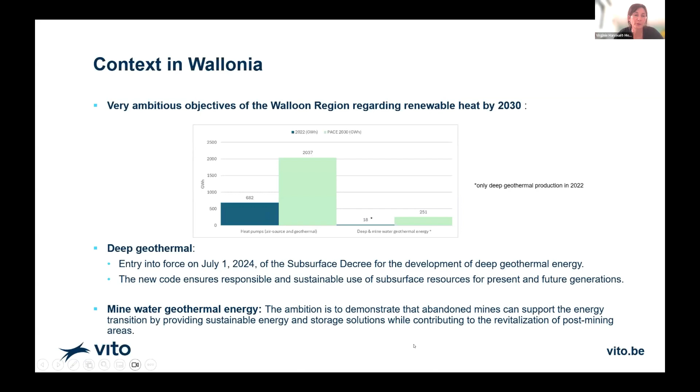The approach that was taken by the region is a quite logical approach. It's a step-by-step approach. So it started in 2018 with the assessment of the mine water geothermal potential at the regional scale. This was followed by a second step, which was looking in much more detail at what the potential can be, looking at feasibility studies in 3 different coal basins, but I will detail that in the presentation. And the final step in this step-by-step approach is the launch of the first Walloon mine water pilot project that should start somewhere this year.

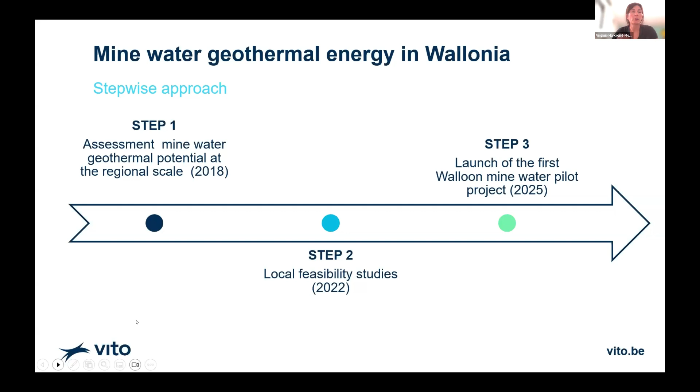So first of all, as said, together with UMONS, we tried to assess the regional potential for mine water to produce and to store heat and cold. Because a study at the regional scale can be very time consuming and we had a lot of data, UMONS proposed to use a proxy to measure the potential at the regional scale. And this proxy was the number of mined coal layers at a given location multiplied by the depth range at which these coal seams were mined.

And we did that on a grid every 100 meters. So it was a huge work that was performed, but what is nice is that it really highlights the locations where you should have the highest potential for mine water.

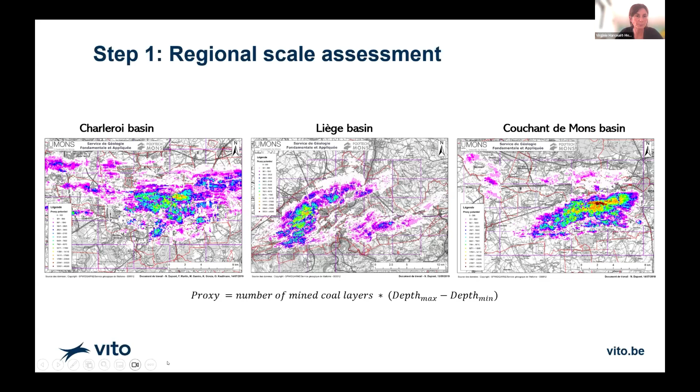And based on the conclusion of this first study, and also based on very conservative assumptions, the total technical potential in the region was estimated at almost 1,700 gigawatt hour. So this is significant potential, and it was sufficient for the region to justify the development of this energy resource in Wallonia.

And as such, SPW Energy decided to launch 3 feasibility studies in the coal basins that I just showed: the basins of Charleroi, the Couchant de Mons, and Liège. So that was really the transition from this first step at the regional scale toward much more local assessment.

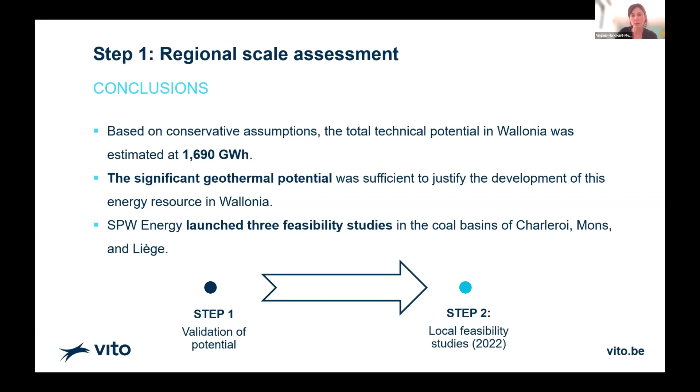The concept that was looked at in the different feasibility studies was always the same. So we always looked at the mine as a potential reservoir for production, but also for storage of thermal energy. And we wanted to integrate this reservoir and this sort of storage tank into 5th generation district heating and cooling.

And the concept was quite simple, and it was using a cold well to target the shallow part of the mine to get cold water, but also to store cold water, and a deeper well targeting this time a deeper level of the mine to do exactly the same, but for heat.

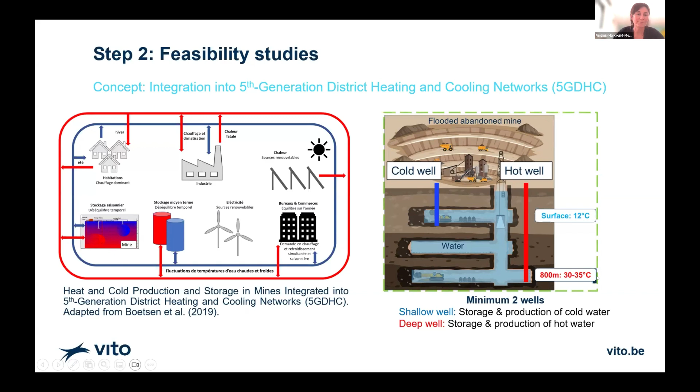The methodology that we used for the 3 different studies was also identical. So we started from the potential maps that we had drawn during the first regional scale analysis. We looked and highlighted the high geothermal potential sites. And then this time, not only looking at the subsurface, but also looking at the potential users and the demand at the surface, we tried to find out what could be the best location if there would be a pilot.

Once we had selected a specific site in each of these basins, what was done was a quite time-consuming task, but it was digitalization and georeferencing of mine workings, and then assessment of heat and cold demand on this specific site. And eventually, we looked at potential waste heat in the region. Based on that information and data, we could come up with forecasts of the demand to the reservoir.

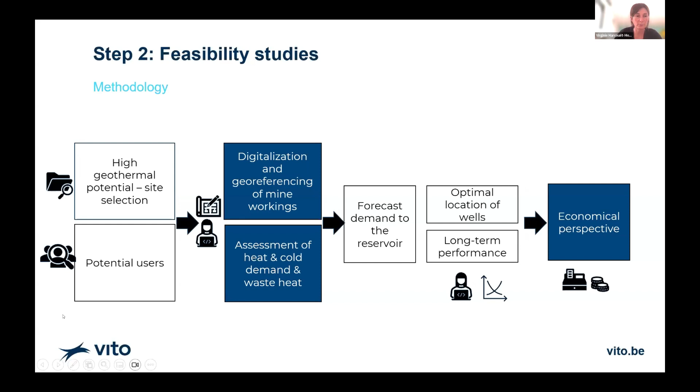And what was also important for us was to propose optimal locations for the wells. So we did that by using optimization scripts that I will explain a little bit later. And we could run long-term performance modeling to find out what could be the behavior of the reservoir on the long term. We also looked at the costs of the different components of the system to get an economical perspective on the project.

So this is just a slide to illustrate what was done. So looking at the potential, we tried to look at high underground potential. We also got some propositions by local actors of the sites that they thought would be interesting for such a project development. Looking also at sites where we could have very different usage, so hospital, administration, residential, and so on.

And what was important was also to make sure that it was not only heating demand that we would have, but also cold demand. And looking at a pilot project, it's always better to have a small number of consumers to initially approach. So in the end, for the Liège case, and that's the case that I will present in more detail, the site in the north was the one selected. And here it was just to highlight that based on the data we collected for the demand, we have 2 main consumers. And the hospital that is on the site is one of the main consumers.

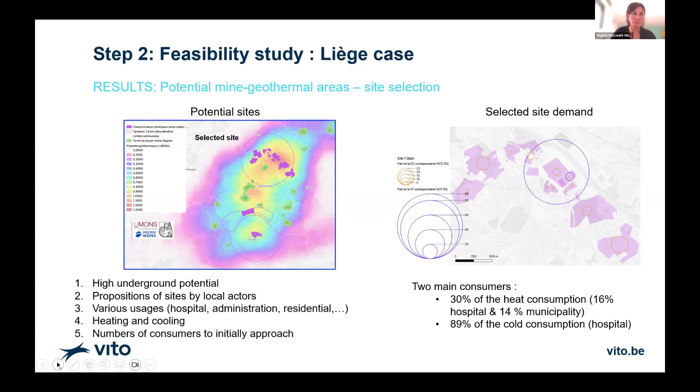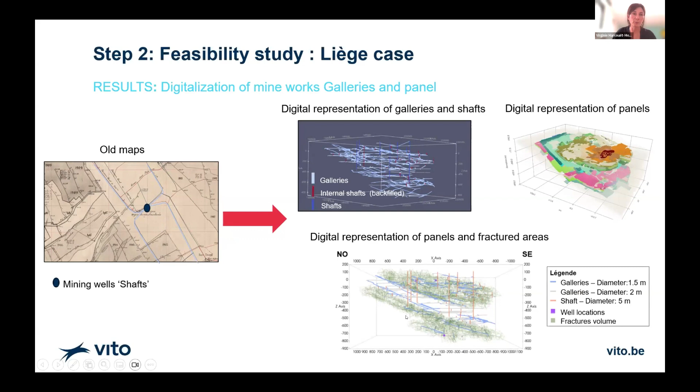So as said, one of the first steps after the selection of the site was really the digitalization of the mine works, galleries, and panels so that we could build a 1D pipe model representing the galleries and the shafts. And that was used for the modeling of the behavior of the reservoir, but also looking into more detail at representing panels and fractured areas resulting from the exploitation of the mine. And this type of representation was used as input as well for the modeling.

When it comes to finding out the best and optimum location for the wells, as said, we had optimization scripts defined and especially written for that project. So trying to find out what were the best combinations of one shallow well and one deep well to optimize the heat production and cold production, but also the storage of energy. So we came up with a series of pairs of wells, and looking also at the surface constraints, we then proposed just a few locations for these pairs of wells.

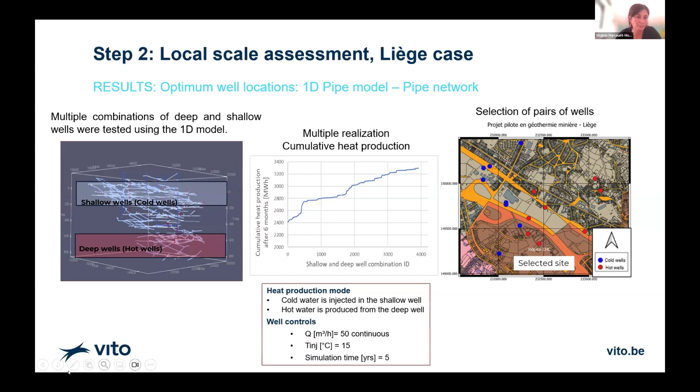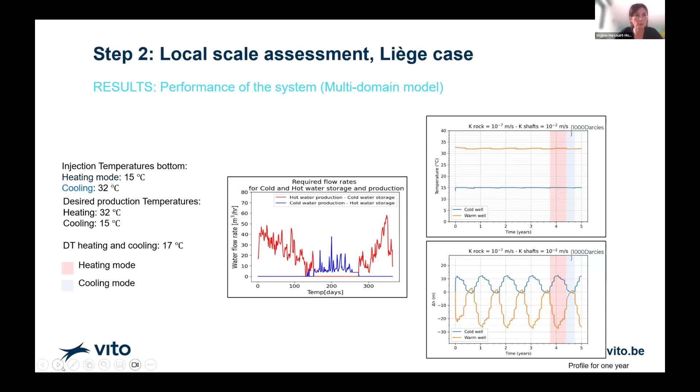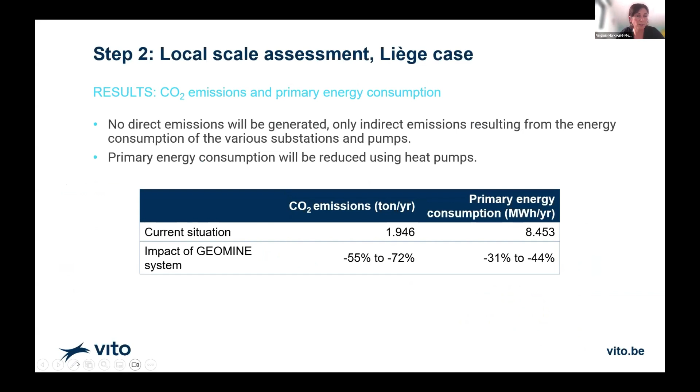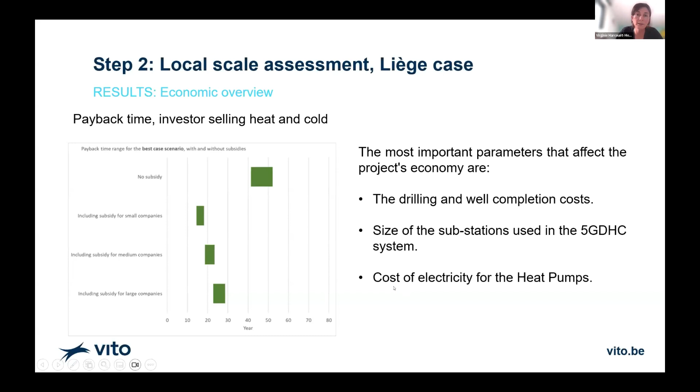So the most important parameters that can affect the project economics are the drilling and the well completion costs, but I think that's more or less the same everywhere, although in some regions it's more the network to put in place that would also have some very large costs. The size of the substation used in the 5th generation district heating and cooling grid, and of course the cost of electricity for the heat pumps.

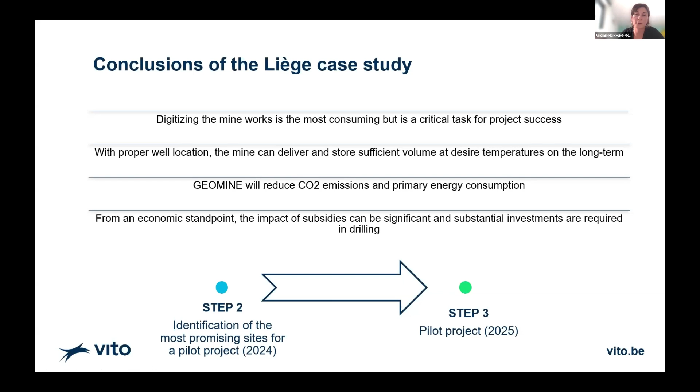With proper well location, the mine could deliver and store the sufficient volume at the desired temperature on the long term. And this system can reduce significantly the CO2 emission and primary energy consumption. From an economic standpoint, the impact of subsidies can be significant, and it's mainly because you need to have quite a lot of investment when it comes to drilling of the wells. In any case, what is important here is that this feasibility study gave some good and positive results, so the region decided to go on with the idea of a pilot project and the launch of a pilot project.

And that's my last slide. I hope I still can present it. So that's the future that should start this year. There was a call for tender last year. Projects were submitted beginning of the year, and the selection process is ongoing. But it's basically to really unlock and showcase that the concept can work, and to raise awareness and communicate about geothermal energy solutions.